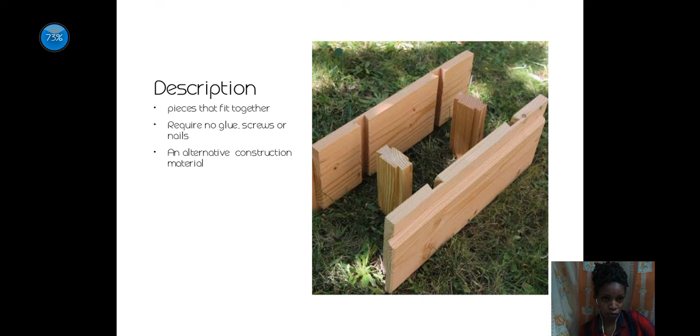I'm a student at the University of Nairobi, and this is my term paper presentation on interlocking timber block housing. Interlocking essentially means two parts or pieces of a structure fitting together without the use of glues, screws, or nails. It is an alternative construction material that is currently being promoted.

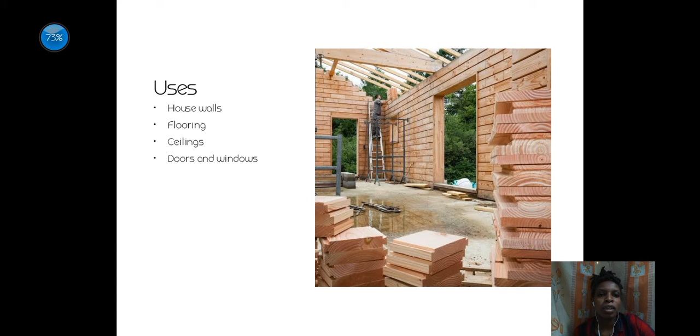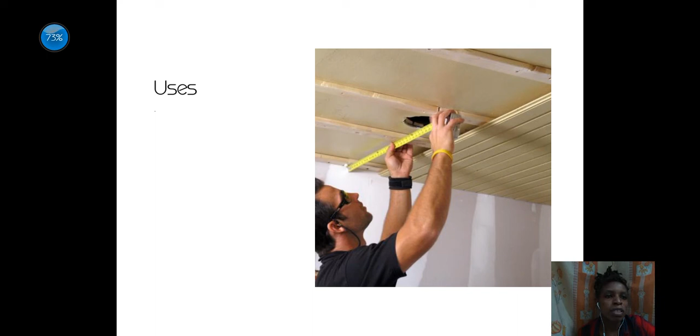Starting with the fact that it's sustainable in the sense that the structure can be assembled and disassembled quite easily. So whenever you feel you need to put down the structure and maybe use the material for something else, it can be easily done. The limited energy consumption in the sense that you do not need machines to put the structure together. You simply need a few people or maybe even one person. Someone as tiny as a kid can actually put a structure together.

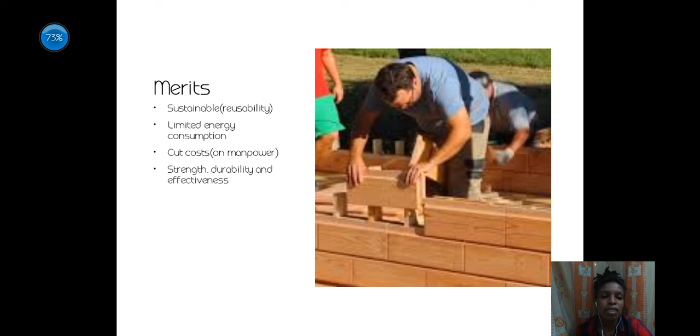Cutting on costs, as I have said, you do not need so much manpower, so the labor in that sense is reduced. The strength: the structure that results is just as strong as a structure that's made of concrete or other material. I mean, it can stand for as long as 50 years. So that speaks to its durability as well, and the effectiveness in the sense that the structure serves its purpose just like any other house.

Its demerits: the high initial cost of sourcing timber. Timber is quite expensive, and its relation to climate change. Whenever you speak of timber, the first thought that comes to your head is maybe deforestation. I mean, there is reforestation and afforestation, but then deforestation is more popular.

So yeah, the precision requirement in the sense that the grooves and tongues have to be of just the right size to fit together. So you need machines for that, for the precision, which could be expensive. And the durability treatments for the timber to be able to withstand climatic, environmental, and biological factors could be expensive as well.

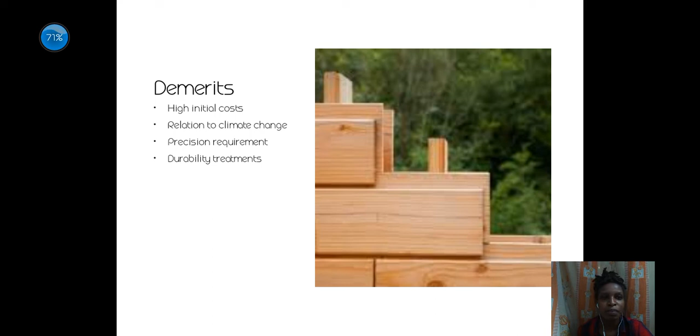Sustainability: the reusability of these materials speaks to its sustainability. So it can be used for long. The availability in the sense that this material is essentially made from softwoods. Softwoods are known to be fast-growing trees, like Douglas fir. They grow quite fast. Ease of repairs, in assembling and disassembling. So whenever you need to do a repair in, say, a part of the structure, you can disassemble that part

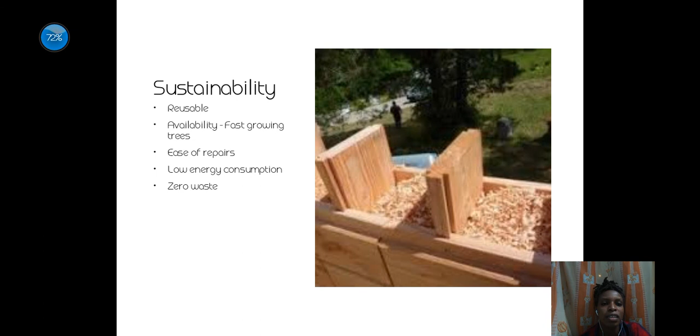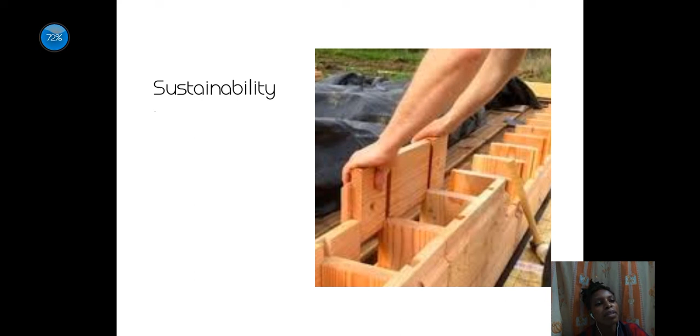and do your thing. Low energy consumption, as has been explained in the merits, and zero waste, since you use all the resultant materials, like the shavings can be incorporated into the walls as insulation. So in that sense, you're not wasting anything. So this is a support image on the sustainability, showing the low energy consumption, and the ease with which you can assemble and disassemble the structure, as well as the kind of machines you need to put it together. So that's a hammer right there.

The opportunities that this construction material presents for Kenyan youth: it's a new technology in the country. I haven't found any structures in terms of a house that have been put up using this technology. So the youth have an opportunity to play around with the technology, come up with new designs, be creative and innovative.

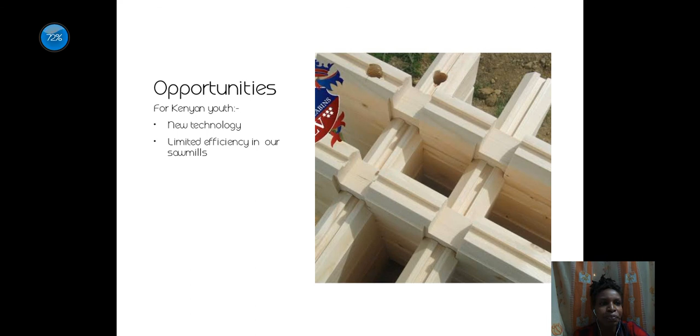Then our sawmills have a very limited efficiency, so the resulting waste is available for the youth to use to come up with this construction material. I read somewhere the efficiency could be as low as 28%. So much of the wood is left to be used as fuel and all that. So the opportunities also pose a few challenges.

It's an expensive initial investment, both for the machines for precision, and the sourcing of the wood itself can be expensive. You need research. As Kenyans, we need to find out how the different environmental factors affect the wood and how we can customize it to be able to withstand these different factors and ensure its durability.

It's an unpopular material in the sense that there are other materials that are more preferred, which means that the youth would have to sell this particular product, market it and all that, convince Kenyans why they need to use this material. And the availability comes in the sense of the sourcing of the material itself and the competitive uses of wood in the country for other uses.